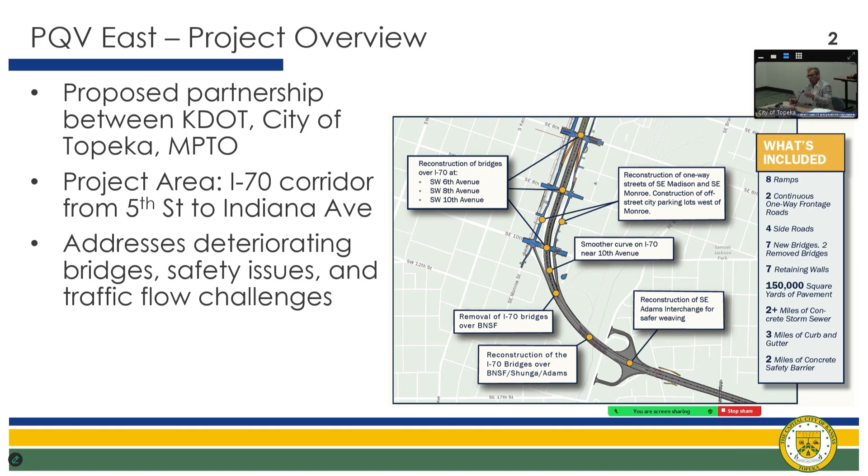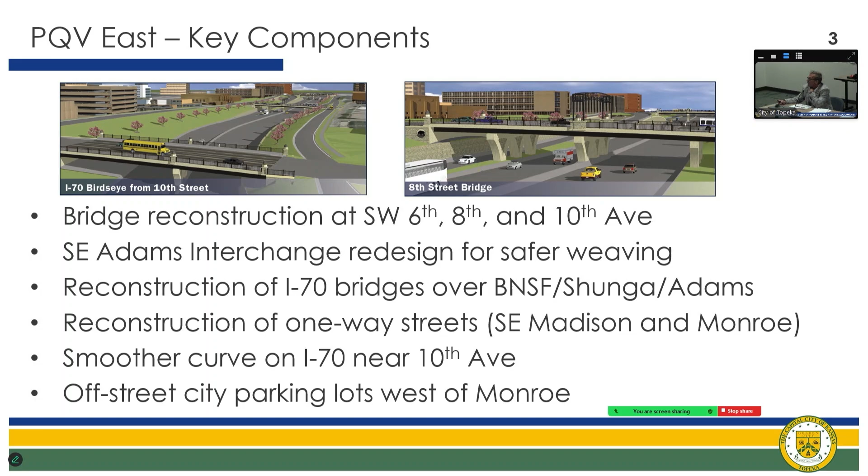So some of the critical components are complete reconstruction of the 6th, 8th, and 10th Street bridges, as well as the bridges over BNSF, the Shunga, and Adams. Complete reconstruction of Madison and Monroe, smooth out the curve, and then, as I mentioned before, moving those city parking lots on the west side of Monroe.

Benefits to this: corrects road deficiencies, meets current design standards, it allows for increased design speed and traffic capacity, safety improvements, and then, of course, downtown access improvements, and reduces the long-term maintenance costs.

Probably the biggest one is those bridges are getting towards the end of their useful life, and they are becoming more and more of an issue for KDOT to maintain. At some point, they're going to have to replace them. And if we don't do this in a comprehensive project, replacing them all at one time during a closure, that means that we're going to be doing them piecemeal, one at a time, which means that we're going to necessarily be disrupting traffic flow multiple times.

So we did, back 2 years ago, got this included as part of the CIP. The estimated project cost 2 years ago was $185 million. So we put a placeholder in the CIP for what KDOT would normally ask the city for, which is a 10% share. And so currently we have as a placeholder $18.6 million in 2028.

That's very optimistic in terms of if it were selected this year for KDOT to get that designed and get it out to bid in 2028. Likely it'll get pushed out to 2029 or 2030. But the critical thing is this has not been authorized by KDOT for design or construction. So we definitely need to lend our voice at the local consults to get them to prioritize this project.

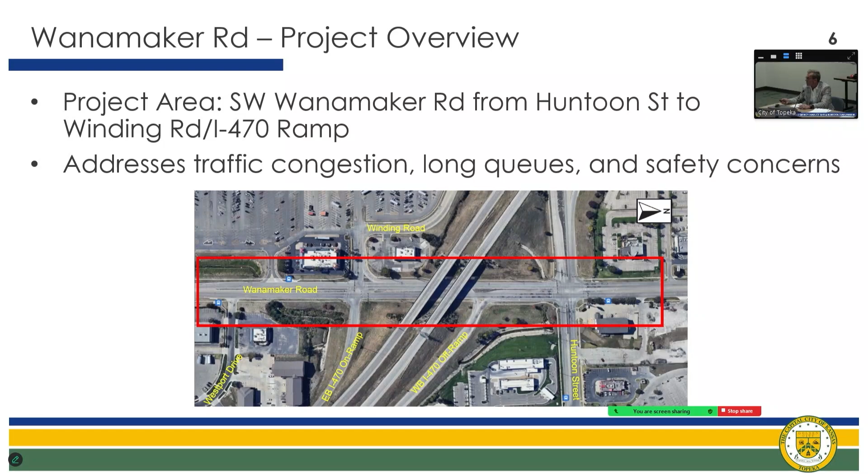So just to go through what our current challenges are, one of those is safety.

The statewide average is 0.4 crashes per million entering vehicles. Multiplying that average by our vehicle volume, we'd expect a critical crash rate at Huntoon of about 0.59, and at the I-470 off-ramp and Winding I-470 on-ramp of about 0.63. Where we actually are is 0.92 — double the statewide average, almost 40 basis points above the critical crash rate at the Huntoon intersection, and 10 basis points above at I-470 and Winding. So we have a traffic safety issue there.

Additionally, our current level of service at Huntoon has the northbound and southbound legs at a level C. That's because we favor that north-south movement on Huntoon, but at the expense of the east and westbound legs, which currently have a level of service of E.

We're going to talk through a couple of scenarios we looked at and the options, and circle back to this concept of level of service. Basically, from a high level, service A through F is just like your old report card in elementary school — A is good, F is bad.

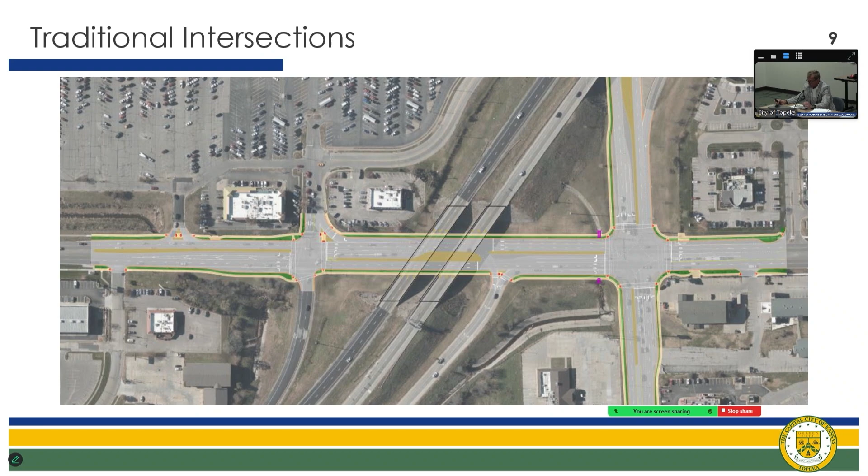They just installed one of these at K10 and 6th Street in Lawrence. It takes a little while to get used to. You follow the signs, you follow the vehicle in front of you, but it's very efficient.

And the other thing that this project would do is this would become one way going eastbound. So just to walk through, if I'm driving along, coming off of the ramp, I'm merging into the traffic right here. Otherwise, I'm coming on this off-ramp, and now I'm merging into this traffic that's moving through there.

Yeah, exactly. So this option is $14.8 million, and again, this would include a roundabout at Westport and eliminate the current access road going in right by the Panera and the Jose Brothers restaurant right there.

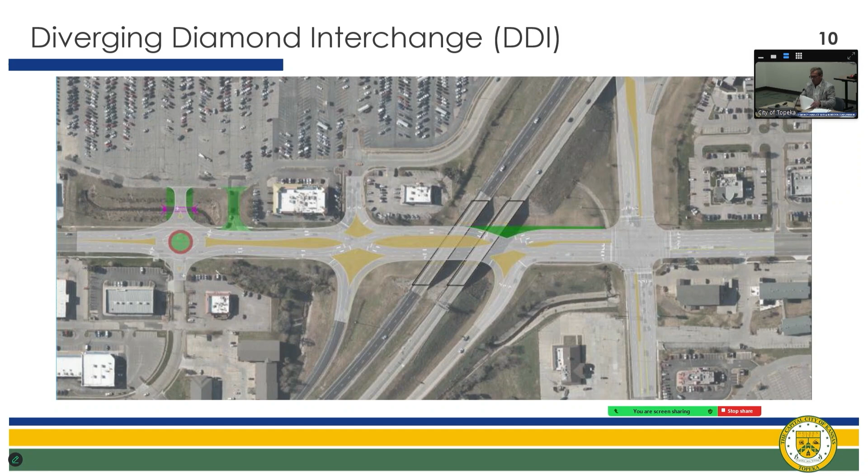And then the last option that we have is a reduced conflict intersection. What this would do is eliminate a left-hand turn off of the I-470 off-ramp, which means you would then have to make a right-hand turn only, and you'd have to go up to Huntoon, then do a U-turn at Huntoon to be able to go southbound.

It would also eliminate a left-hand turn coming out of the mall right there at Winding and the I-470 on-ramp. So what you'd have to do is take a right, go down to the roundabout, whip a U-turn around the roundabout, and then you'd be able to go north.

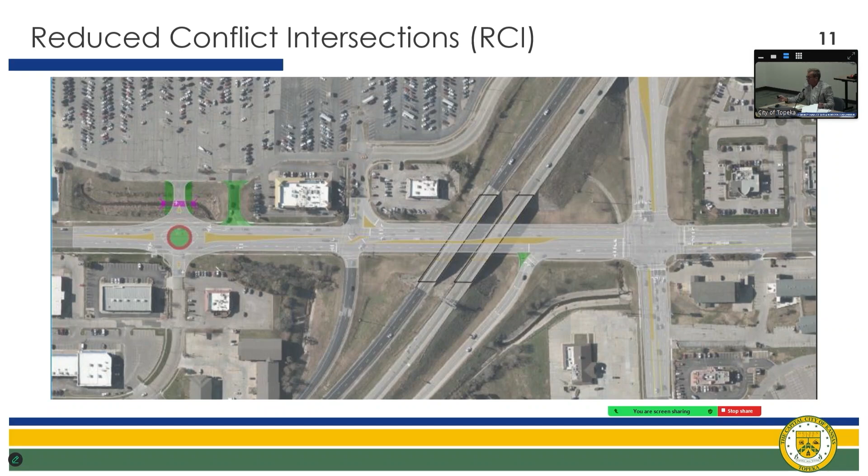Total project cost for this one is $13.6 million. So then diving into where we are with level of service.

So, no-build situation, leaving Wanamaker where it is, at Wanamaker and Huntoon, we're looking at level of service in 2045, or 20 years out, of D, E, and F. D is minimally acceptable. E and F are obviously not acceptable in terms of level of service. F, we're looking at average delay of more than 80 seconds to get through an intersection.

When we get into the alternatives, either the traditional option of adding additional turn lanes, or the DDI, or the RCI—reduced conflict or diverging diamond—you see all of those are basically B, C, and D on those, and then you see down below in terms of the impact on the other intersections.

Doing nothing, Winding Road eastbound has a level of service of E, the rest of them B, C, D, and then we get into the alternates where it's A, B, and C largely in terms of the improvements on the level of service.

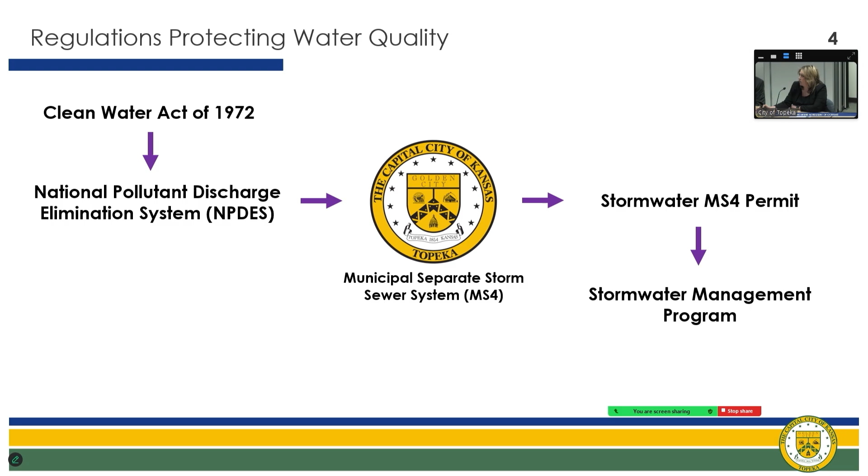So we manage the stormwater utility underneath this overarching permit, our stormwater MS4 permit, which mandates that we develop a stormwater management program. So we've been doing this for years. Our stormwater management plan is a flexible plan. We update that annually, and then we're required to report on that plan annually as well.

Many of you might not be aware, but the EPA loves auditing us. We've had audits on the wastewater side, lots of stormwater audits, and then we had our first EPA water audit last year. But they absolutely love coming. I don't know if it's because we are the capital city and we're close, or if it's because we are one of just 3 Phase 1 cities in Kansas. Phase 1 NPDES permit-wise is the larger cities in Kansas. So we have a little bit different set of regulations than a Phase 2 community, which would be like the county.

So knowing all of that, back in 2018, EPA visited us and had a comprehensive stormwater audit. They reviewed our stormwater management program. They want to make sure that our program is in compliance with our permits and that our permits are in compliance with the federal regulations. They identified some needs, some aspects in our stormwater management program that we needed to update to make sure that we're managing it according to best practices and what others in our same position are doing.

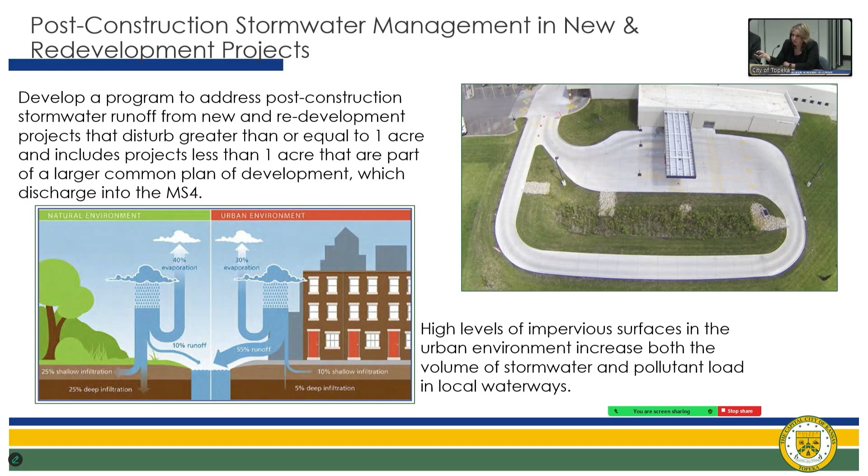So we're not creating more hardship downstream. If you're a new development, most of this impacts commercial or industrial areas. If it's equal to or greater than an acre, we're going to ask you to comply with our requirements that will push the need to incorporate post-construction stormwater management practices, such as this picture on the right showing a basin, and I'll give you a couple more pictures here in a minute. But again, this is to address the high level of runoff that we get when we have rainstorms in highly developed areas.

So a few examples that we have, and I want to note that the city of Topeka is also required to implement best management practices. We don't just ask the community to do this, we're required to as well.

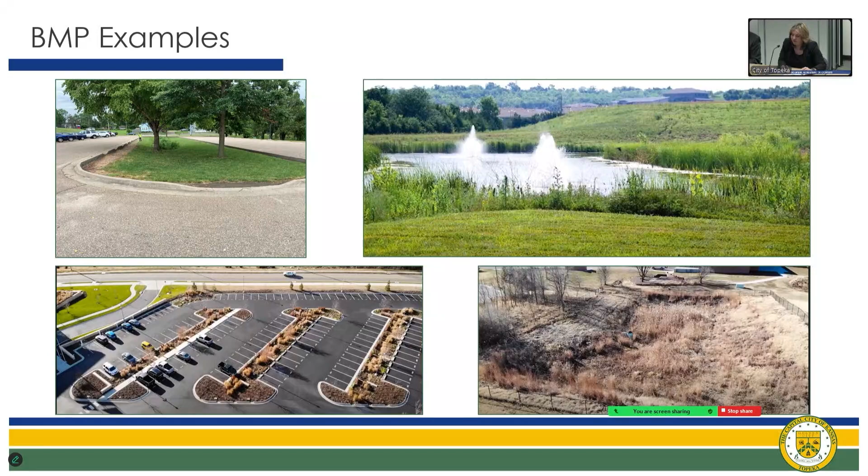Again, the federal government requires the state to make sure they're inspecting us and we're holding people accountable. As part of this accountability practice, anything post-construction since 2021 is required to be doing inspections and submitting those inspections to the city. Our ordinance calls for this, our practices call for that, but we have very limited compliance right now. So we are under a consent agreement with the EPA to say we're going to do our best to get compliance and make sure we're doing the enforcement component of this practice, which is going to require us to be reaching out to all of the folks within the city that have post-construction BMPs, request their records, make sure they're understanding the regulations and know how to comply, and we'll help them get there as best as we can.

But in totality, 190 plus BMPs, 199 between private and city-owned BMPs across the city. So there's a large universe of BMPs out there, and we just need to make sure that we are doing our job to inspect them and make sure the business owners are complying and keeping them well-maintained so that they're doing what they're intended to do, which is clean and manage that stormwater.

I want to take a minute to introduce Aaron Grams. He is our stormwater permit coordinator, and he's going to talk a little bit more about this program. Also in the back here, we have Joe Rontier, who is pretty new to the city. He interned with us for a little while, and he is studying to become a licensed engineer. So he's working as an engineer in training under Zach Stevie, who is to his left. Zach is our stormwater engineer that's been with the city for several years now. They all work in faces that you will rarely see, but they're very integral to our stormwater program and making sure that we're compliant.